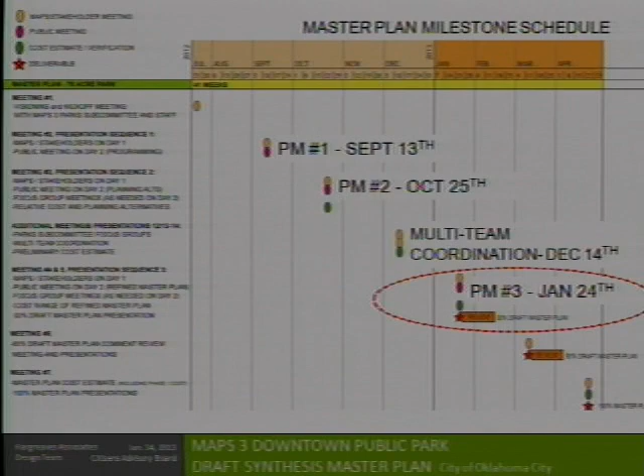We did postpone our public meeting. Our 3rd public meeting was originally scheduled to be before Christmas, but we moved it until tonight, basically to give a chance for the Convention Center team to catch up a bit and for us to collaborate with the Convention Center team some, because there are issues that impact us both, and it made sense for us to meet, which we have done.

Public input, you've seen this before. We asked for public input in terms of the elements that were desired within these categories. We keep this as a checklist to make sure we're fulfilling all we can within the aspirations for the park. We had 3 schemes, which we showed you last time, 3 very different approaches to how we might develop the park.

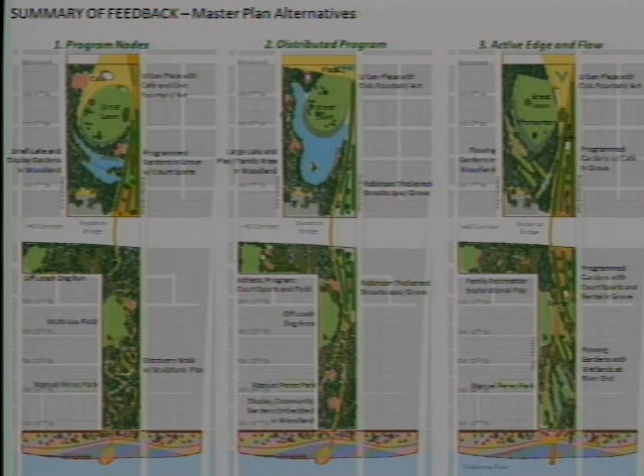We received input on all 3 of those, and basically got comments like: we like the lake, but maybe in this scheme, alternative one, it's too small. We like the way the program is distributed in the park, but perhaps there needs to be more in the lower park, and perhaps the promenade connection to the river needs to be clearer, not the meandering walk you see here.

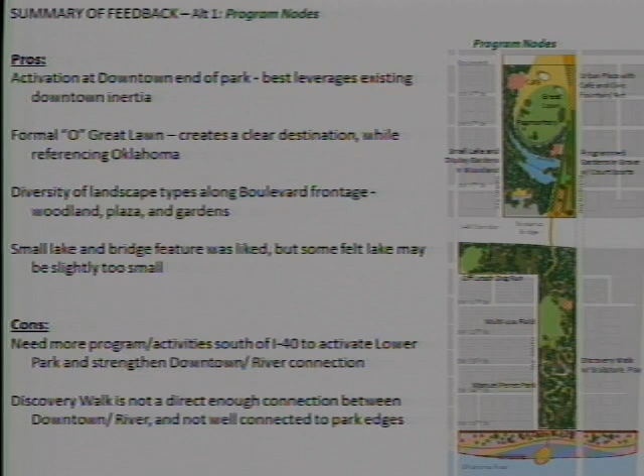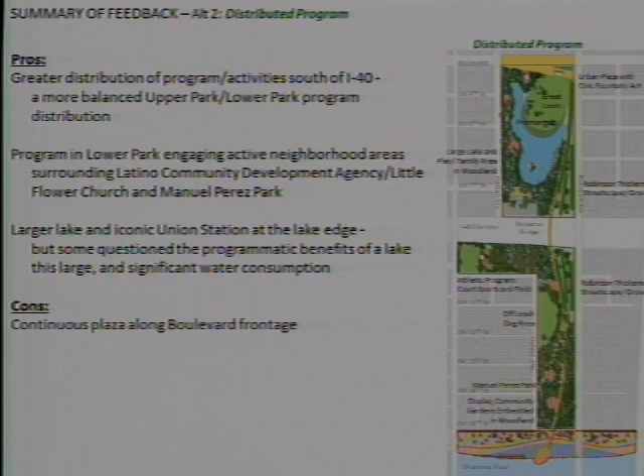Like the Big O lawn, event lawn, whereas in this scheme, alternative number 2, maybe the lake is too big, and maybe addressing the boulevard with one big plaza is too much paving, but we like the way the promenade connects to the river.

And in Scheme 3, we miss having a lake. We think there should be a lake, but we do like the way the lower park addresses its neighbors. The pathway is sort of fanning out and embracing the neighborhoods surrounding the park.

So we took those inputs from those 3 schemes and came up with a synthesis plan that takes the best of each. It distributes the programming throughout the park because it's important that we have an active and dynamic park, but it does emphasize the relationship to downtown and the relationship to the convention center and the 100% corner at Robinson and the Boulevard.

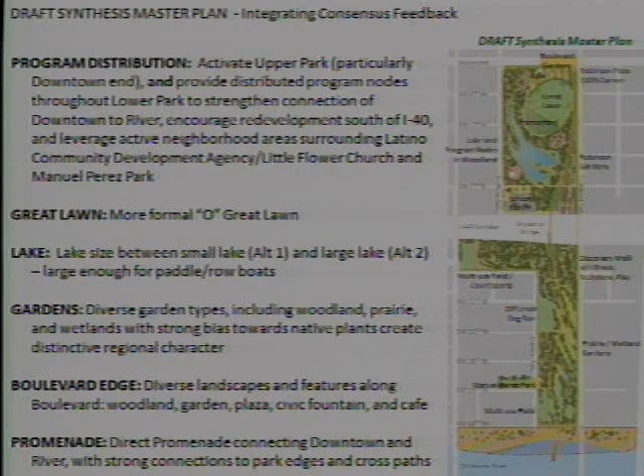So the Big O event lawn is there. A cafe in the future would address the boulevard, and then it decreases in amount of activity as you get closer to the river. So at the river edge, it's more wetland gardens and prairie gardens and those kinds of natural amenities. So you see here a zoning diagram of the plan, with red being the most active, green being passive.

You see a plan without the trees, and then you see a plan with the trees, and you see connection. I want to highlight a couple of things - a connection to Manuel Perez Park in the lower park.

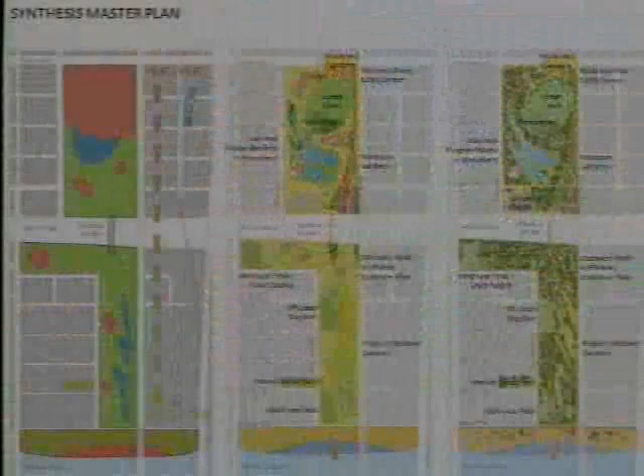We have met with leaders of the Latino community and are very committed to making amenities in the downtown park that can leverage that adjacency and help raise awareness of Manuel Perez Park. We're also proposing multi-use fields and court sports adjacent to the Latino Community Development Agency and the Little Flower Church,

which will be a great synergy of uses for those two community facilities. In the upper park, I want to mention Union Station and the importance it has as a jewel within this park, and the ways it can be reused are quite phenomenal in terms of the opportunity.

We feel very strongly in our recommendations that the building needs to be restored, programmed, and integrated into the park. A lake, big enough for recreational boating and paddle boating, the event lawn as we talked about before, and various children's and adult play areas.

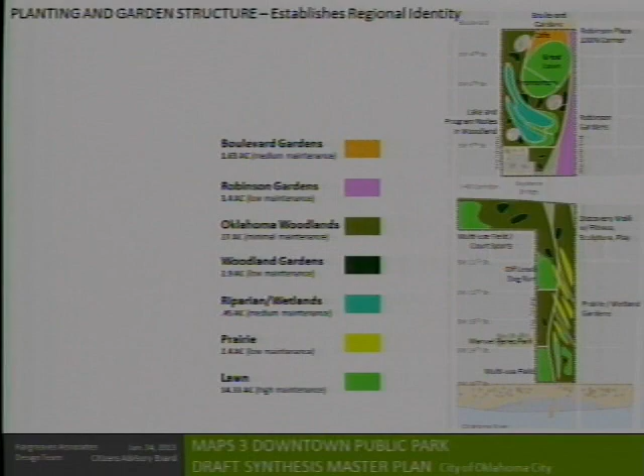This is the landscape diagram of the park. I want to pause here to make a point that we are trying to make this park very specific to Oklahoma. A rich landscape with 70 acres - we're able to create a big landscape that is about Oklahoma, showing a mix of landscape types that will lead to that diversity.

Imagine with the Chesapeake Arena's improvements and their new plaza on the opposite corner - imagine when the Thunder wins, tens of thousands of people spilling out of the arena and filling into this park and onto the event lawn. The event lawn is 6 times the size of the lawn in Myriad Gardens, so it can host very large events, and that's the idea.

And then the boulevard gardens along the boulevard, the cafe along the boulevard, and adult play along the boulevard, and then children's play behind the Great Lawn and adjacent to the lake.

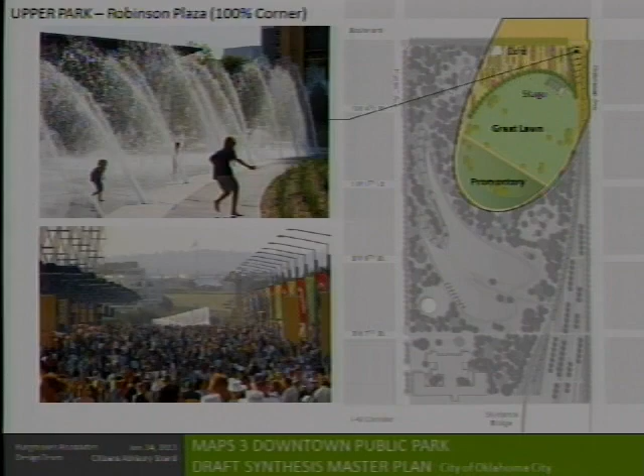So that 100% corner, just highlighting that with the Great Lawn - the promontory hill will be 25 feet high, so it'll be a topographic marker in the city and a destination in and of itself. The fountain, as I mentioned, gardens, as I mentioned, lots of color, lots of richness there.

So that view, and you can see in the upper corner of your slide, you see the little red viewing cone. You're standing at the apex of that triangle, so this is looking into the park from that corner.

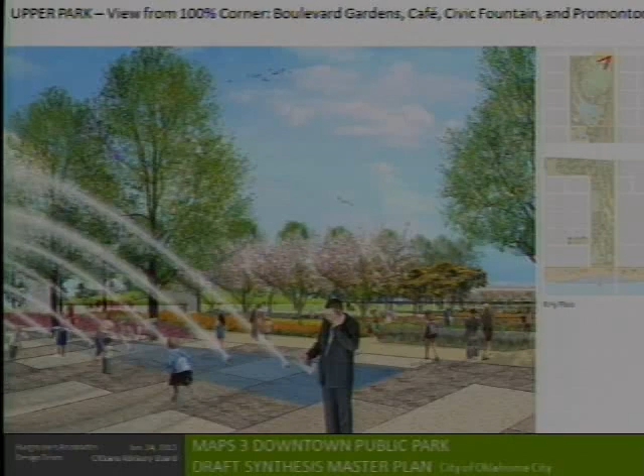You can see an idea of an interactive fountain, you see the hill in the background, and you see the scale of that great lawn and the hill and the stage, compared to Myriad Gardens as a scale comparison overall and as a scale to the Grand Lawn in Myriad Gardens.

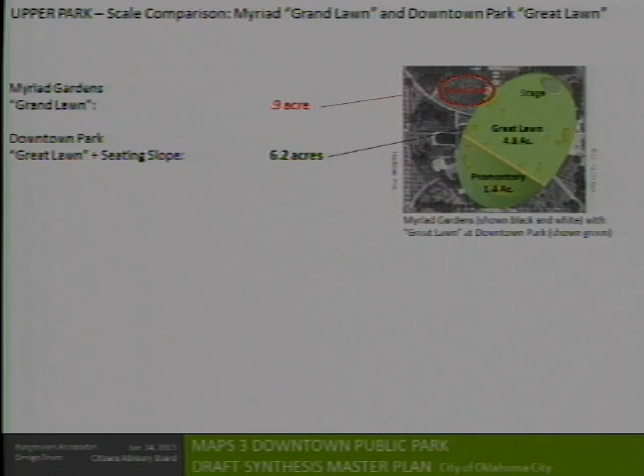We're often asked, how is this park different? Why do we need this one as well? Here's a good example of how and why - it allows such a different diversity of uses and is quite different in feeling.

In this park, standing on the promontory looking back at the skyline, you get this awesome perspective of the skyline because you're just outside of it rather than being in the shadow of the skyline. So it allows that relationship.

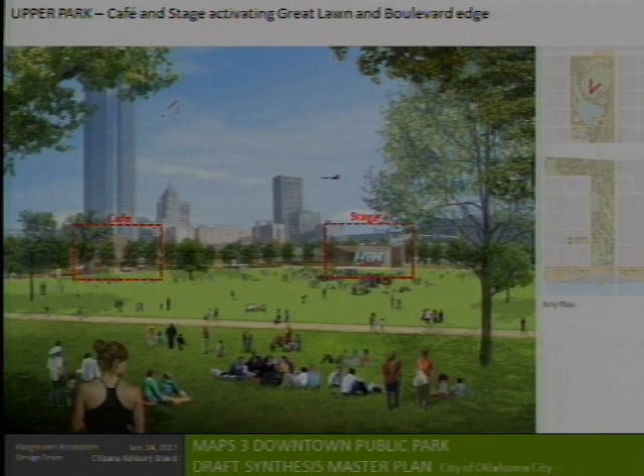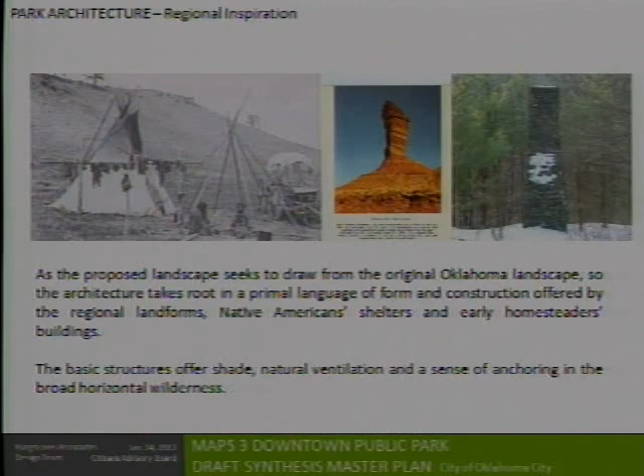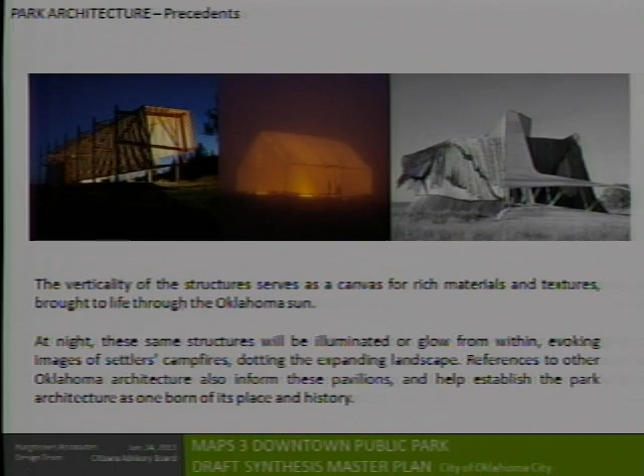The cafe and the stage - our team includes Butzer Gardner Architects, and they're working on a vocabulary that says welcome, hearth, fireplace, gatherings. You see the cafe has a vertical element, and they're drawing from the heritage of the early settlements of Oklahoma. When all the settlers arrived and their campfires were lit at night, suddenly there was this array of lit tents at night - so the idea of hearth, warmth, welcoming, and shade.

So you think about the shade structure being almost more important than the cafe itself, and we feel it's really important to get the idea of the cafe right.

It's not a white tablecloth restaurant. In the first phase, it might be food trucks. The idea is to get activity, energy, a buzz, something that's local and appropriate to the market and will succeed. That's a very important part of our planning.

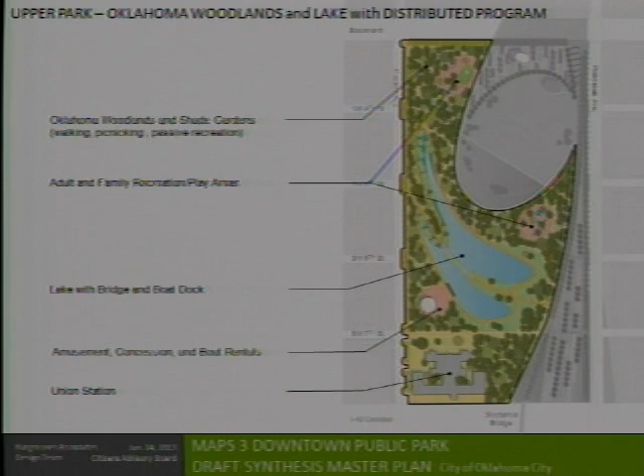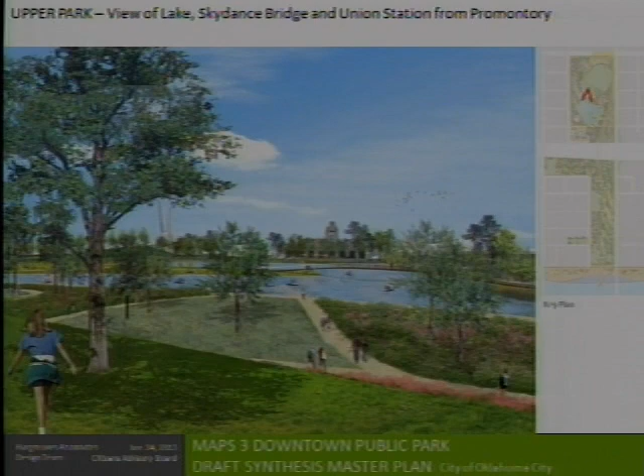The rest of the upper park, including Union Station, is mostly woodlands, with lots of shade, the lake, and children's play and spray ground. If you're standing on top of that promontory and look the other way, you see across the lake to Union Station in all its beauty, and Skydance Bridge. So boating on the lake is very important.

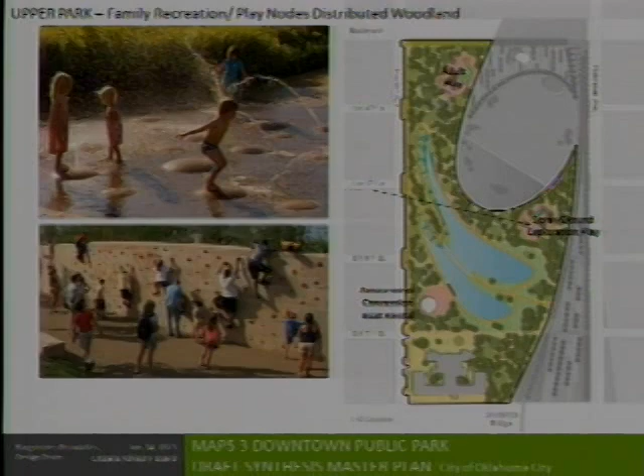Wetland edges with rich diversity of landscape types and plant materials, children's play, water, climbing, and then Union Station and the asset it brings in terms of how it can be used—it's quite big. Right away the two meeting halls could be restored to become a place for weddings, and imagine those weddings spilling into this beautiful landscape.

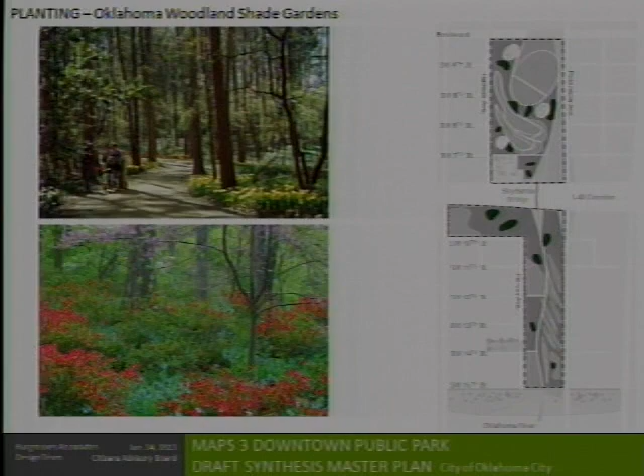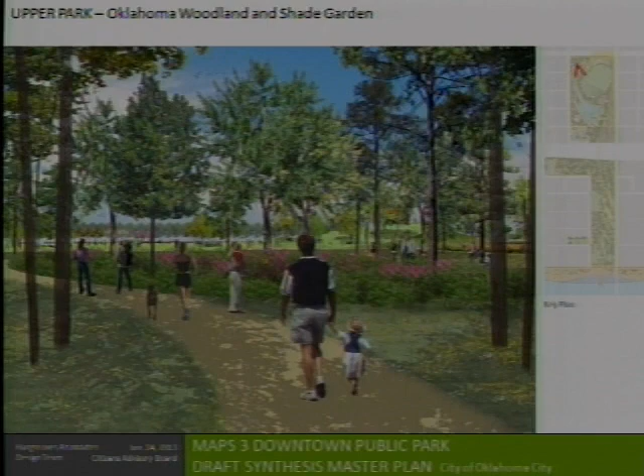Again, the idea of the woodland as we move to the lower park—woodland gardens as destinations within that landscape, not throughout, because we want views through the park, openness, and for it to feel safe, secure, and welcoming, but also places of real rich landscape diversity. This is the view from the other corner, from Hudson and the Boulevard. You enter into a very different kind of character, one with shade and big trees and beautiful landscape.

So that's the model, which is also here on the table, and that's the long-term vision for the whole thing. Moving to the lower garden, I mentioned some of the features of program or uses in the lower park and the relationship to the river and recreation.

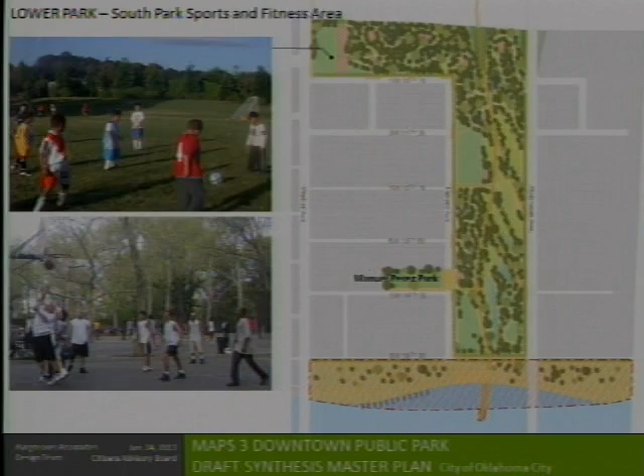Natural landscape, a respite really from the downtown environment. In this view from the lower park, looking north, you see Skydance Bridge and the Devon Tower, but you're in a very natural environment. You still see the edges though, so it still has an openness that makes it feel safe—and the kinds of uses we can have happening in a pavilion and a plaza adjacent to Manuel Perez Park.

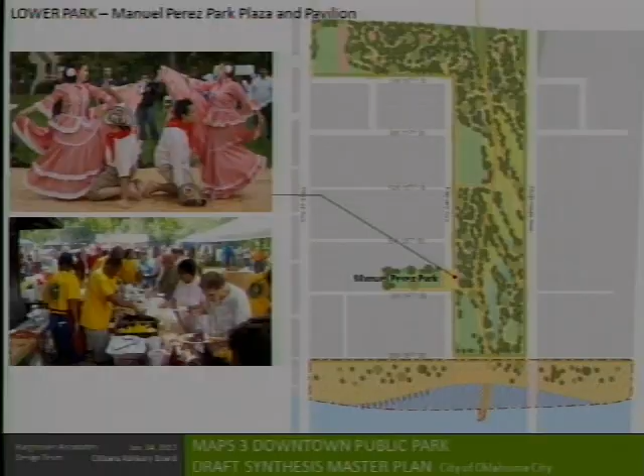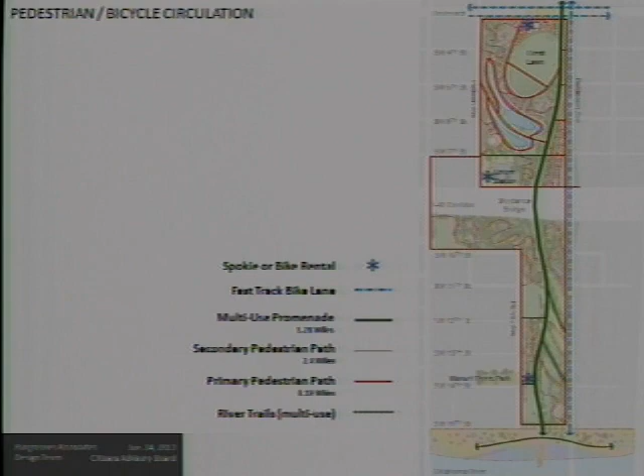Very important—we've been meeting with bicyclists and coalitions who want to use the park in various ways. We have high-speed bicycle ways, shared ways between bicyclists and pedestrians, and trails that are strictly pedestrian. So a full array of ways to move through the park, and links of paths so you could plan your run for how long or how much distance you want to cover.

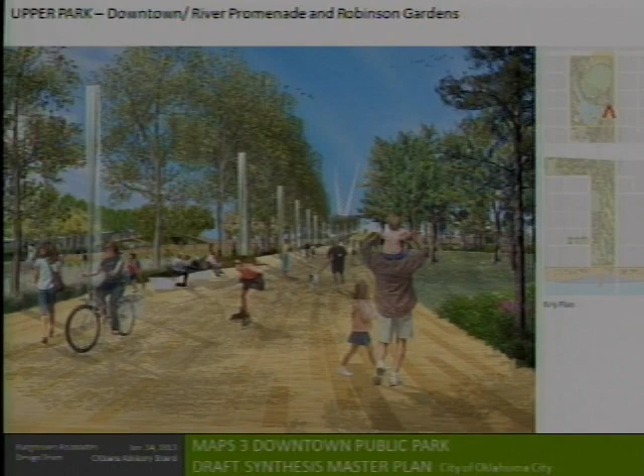The promenade is what ties downtown all the way to the river. Along the promenade are these beautiful lights that will look great in the day and at night, custom benches, people biking—the Spokies you see here in the image—and the promenade connecting right up onto Skydance Bridge in a way that isn't possible today, but will be when the promenade and the park are built. The idea is these iconic lights marching all the way down that promenade, connecting river core to shore.

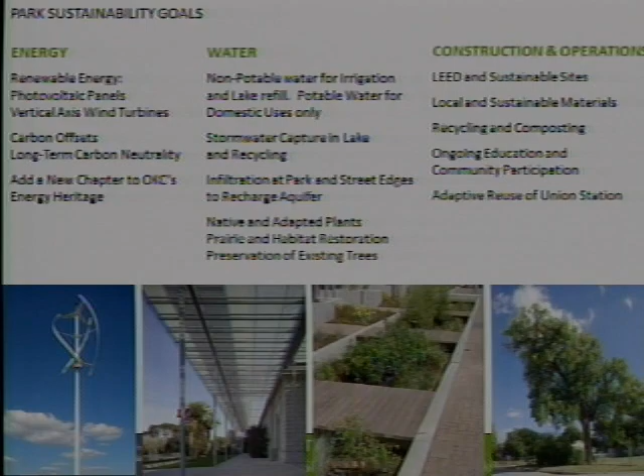And sustainability—we showed you this last time so I won't go into detail, but managing stormwater on the site, alternative sources of energy, using and supplementing the water table, and then using that for the lake and for irrigation, capturing our runoff to make that possible.

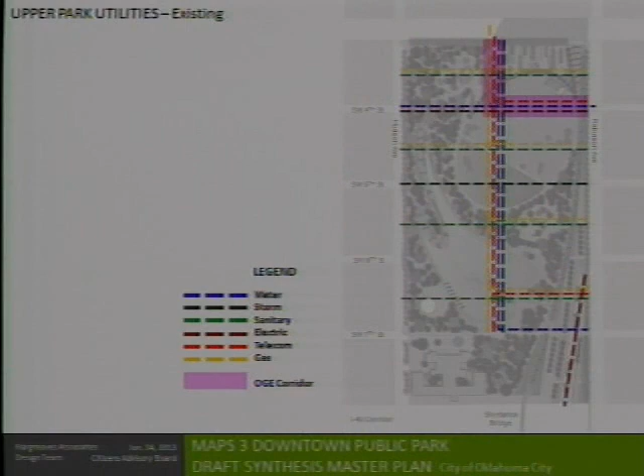We're also looking at ways of using our Phase 1 funds to the best advantage. This isn't finalized yet, but this was the mandate given to us by MAPS. We have certain considerations, like where the utilities are—they're all over the place right now—so we're looking at ways to consolidate the utilities.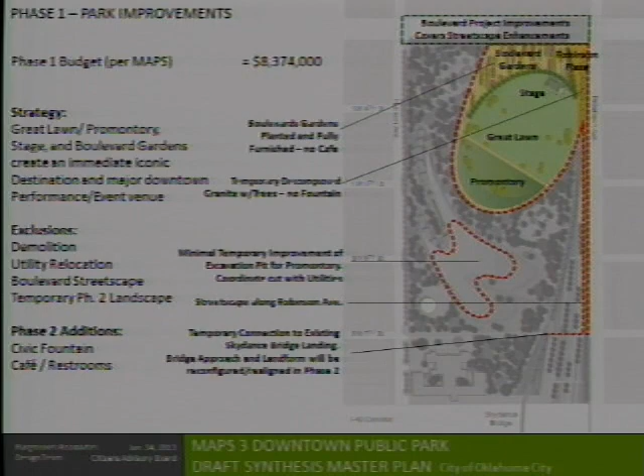We're also looking at going ahead and creating the event space, if we can, in Phase 1, so that it can begin to generate revenue and activity in the park. We're trying to build as little as possible in a temporary way, and build what we can in a permanent way so we don't rebuild it later. These are the Phase 1 analyses we're doing now, working closely with David and his team to figure out how to make this happen.

One thing I want to point out: we probably will not in Phase 1 be able to afford the big civic fountain and our art piece and our lighting piece in the corner plaza. So this corner plaza probably will be a temporary plaza in Phase 1, but the Boulevard Gardens and the Great Lawn and the promontory we hope to be a permanent improvement.

So I'm going to ask Candace to talk for 2 or 3 minutes about some of the issues we're investigating on economics.

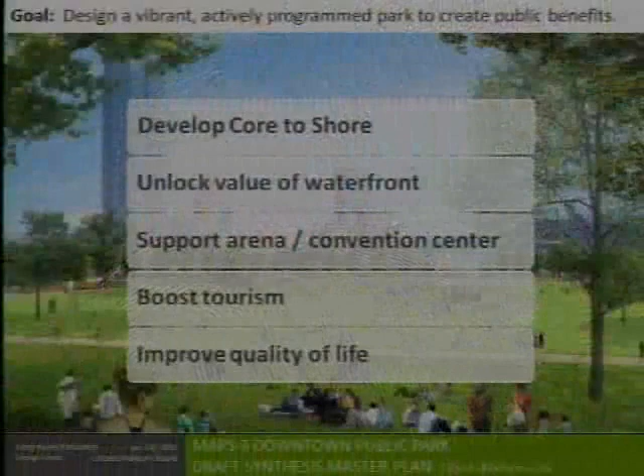It's worth spending a few seconds on why we're having this conversation. What we're finding all over the country, and I suspect you'll find this too as you move forward with these projects, is increasing willingness and interest on the part of civic bodies in investing in projects that brand cities, create economic development, and help create new neighborhoods and taxable value for cities. But thinking through the operations piece increasingly means thinking about generating new forms of revenue aside from the general fund, and these civic investments are being challenged to dream up governance structures and sources of operating funding that can support them after the public makes the initial capital investment.

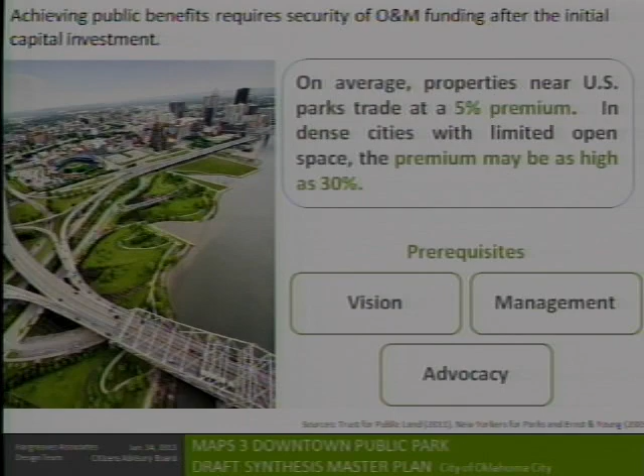We're also finding across the country that, properly managed with sustained civic advocacy and a vision that guides creation of the park, parks create real value — in some places, very significant increments in value. But sustained vision, advocacy, and a competent management structure are absolutely essential to seeing that value created, which is important because over the first generation of a park's operation, you're likely to see operating costs equal to or in excess of the capital costs invested.

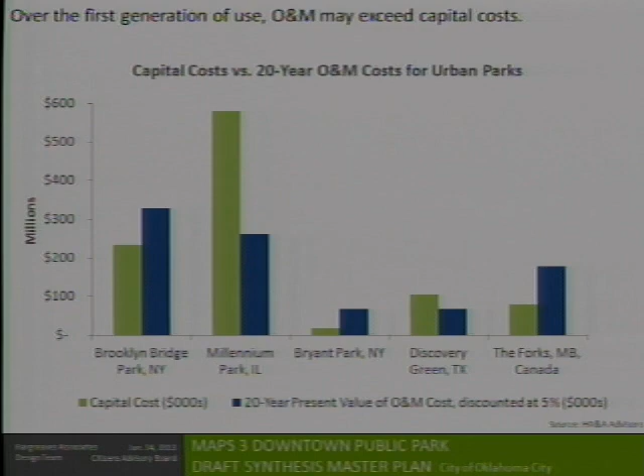Operations of these kinds of signature parks is frankly significant. In this chart, the green bars are initial capital cost and the blue bars are the 20-year present value of operations cost, seen across a variety of new parks across the country. The only exception to that rule is Millennium Park, and the reason is that there's a big, giant parking garage underneath the park on the capital side.

So as cities think about where these new sources of funds are going to come from, they're looking at a range of potential sources — from new ways of diverting public revenue through special assessments and BIDs, all the way to more private forms of fundraising, including tapping into real estate value and looking to corporate philanthropy and sponsorships. In between, there's a variety of earned income ideas that people play with. Where on that spectrum you land, and which sources of funding work, is very much a function of what the specific park is supposed to do.

Is it supposed to create a new downtown? Is it supposed to create a postcard of your city? What are the goals? And then, what do local culture, law, and regulation support?

Given the goals established for this park, you're very likely to be looking at tapping into the value of the real estate that this park will create over time. We think, and we're going to tee this up as part of a menu of options, you'll be looking significantly to revenue achievable from a new BID or HOA established around the park, or an extension of the existing downtown BID. That source of revenue, though, will take time to accrue, so the challenge is to think through where the source of revenue is for the initial phase of engagement.

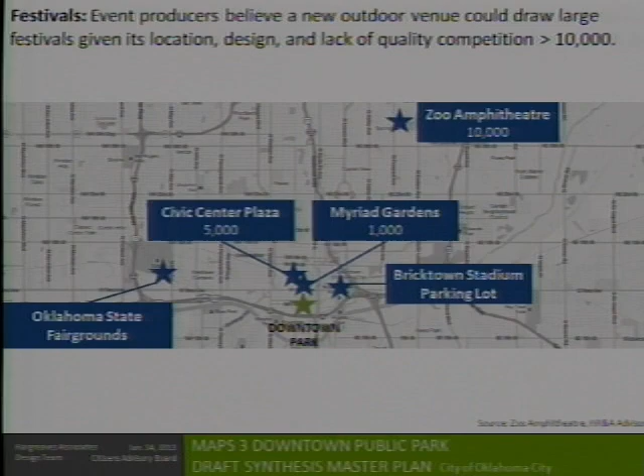We've been looking very hard, consistent with the design for Phase 1, at the potential to generate revenue from events. You have a sweet spot here because this area doesn't have a quality event venue that can support this, at the size the Hargreaves team is proposing to design. There's no 20,000-person event venue of quality in this region.

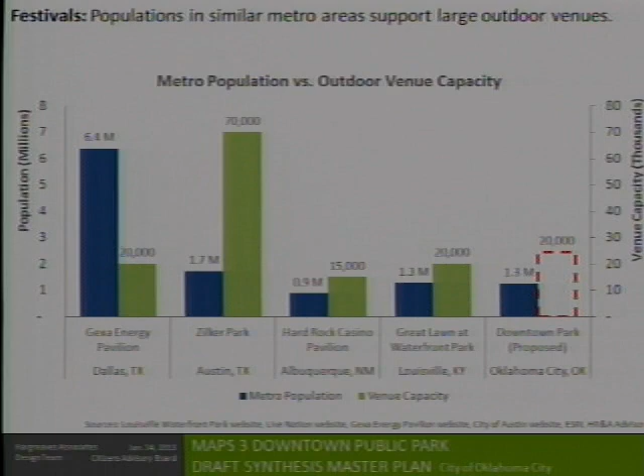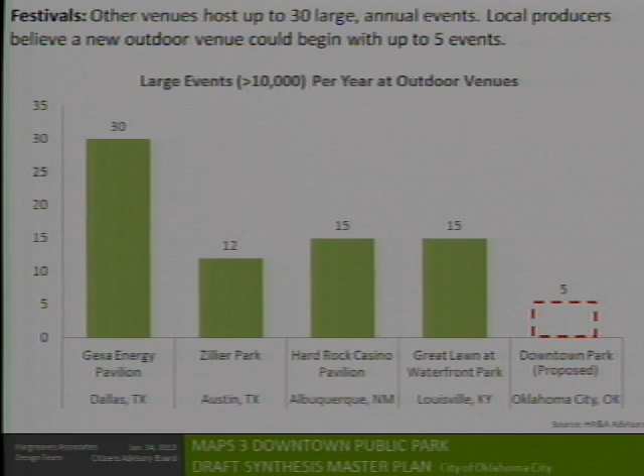If you look at other mid-sized cities across the country, including in this region, there are a host of cities supporting venues of that size, and local event producers believe Oklahoma City could support such a venue. Other similarly sized cities with venues of that nature see them support 10 to 15, as many as 20 or 30 events. We think as a starting point you could do 5 large events in a new venue in this park in the short term, a judgment confirmed by local event producers.

Now, how you manage events is going to be critically important to the achievement of revenue.

There are a host of different ways of organizing events and thinking about how active a park operator wants to be in production. The more actively involved you are, the more money you make, but also the more risk you take on. Thinking through that risk-revenue profile and what makes most sense for the operator of this park will be important in the coming weeks.

I say that because other sources of earned income in this park are likely to be fairly small. The other kinds of earned income implied by what Mary Margaret showed you, boat rentals, bike rentals, and the cafe or food truck operation, will, if managed well, break even, but are unlikely to be major sources of operating revenue.

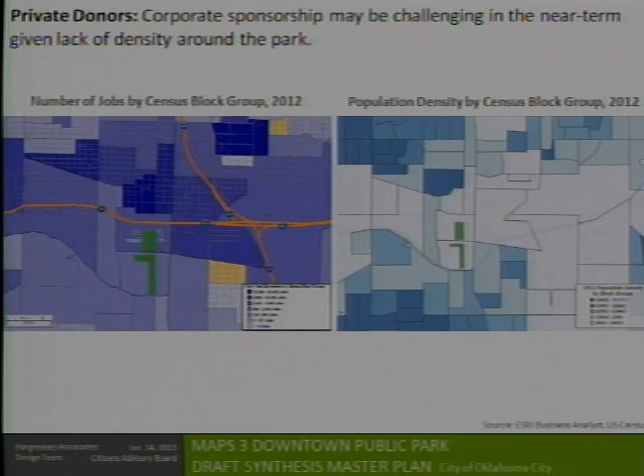So you're looking, in the first instance, to events and potentially to parking revenue associated with events, then potentially to corporate sponsorships. We don't think this will be a place for national corporate sponsorship in the short term because there isn't enough density or enough eyeballs on the park, but you could certainly look to local, civically engaged philanthropists who would want to brand elements of the park as being associated with them. This suggests that at least for the first 10 to 20 years of the park's operation, there will have to be some level of public support in the mix.

Events plus parking plus some modest other kinds of earned income, plus philanthropy, plus some level of public support. We will also be thinking through in the coming weeks how that public support can be delivered in a way that is palatable in the local political context, looking, for instance, at various kinds of fees associated with visitation to the area. Over time, of course, you would expect to see that public support drop off as other sources of revenue come in.

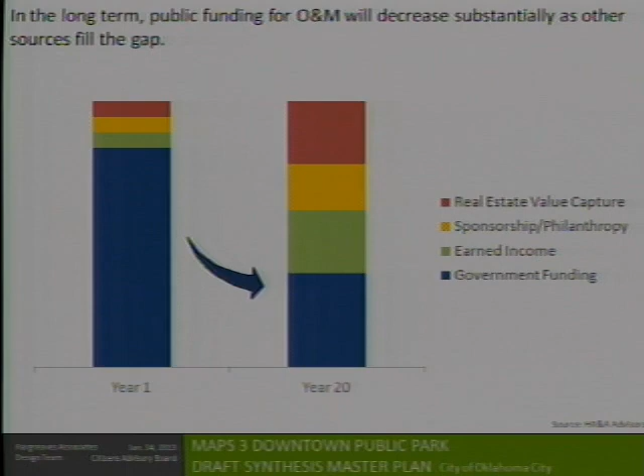Thank you. And I should have introduced Candace a little more fully. That's Candace Damon with our economic advisors, HR&A. Part of our scope is to come up with strategies, possible strategies for you as we complete the master plan.

I just want to conclude by saying that we are doing a great deal of coordination with other projects that touch us and affect us, and vice versa. David has been organizing fantastically productive coordination and collaboration sessions where we're working with the team members for these other efforts: transit, the Boulevard, the Convention Center, and the Alliance development planning efforts. So we're all working together and making great strides in terms of coming up with the best solutions for all of those.

I want to touch on the Boulevard. As part of that effort, we've all been talking about the nature of the Boulevard, and we were tasked to draw that up. We're proposing that the Boulevard take on a transition character in the blocks between the Convention Center site and the park site, so that it narrows down, becoming more plaza-like than road-like in that zone. It still accommodates cars, but it feels like a place for people.

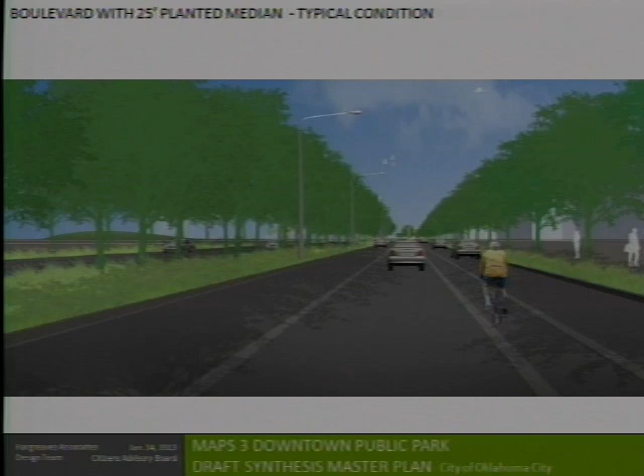So the median goes away as you make the transition coming from east and west at Hudson and Robinson. We pave it like a plaza. We make it as narrow as we possibly can, and therefore as friendly and open as we can to pedestrian movement. So if you're approaching from the east, you see the planted median, and then as you get to Robinson, you see that planted median disappear and become a plaza, which almost makes it feel like you're driving through the park instead of adjacent to it.

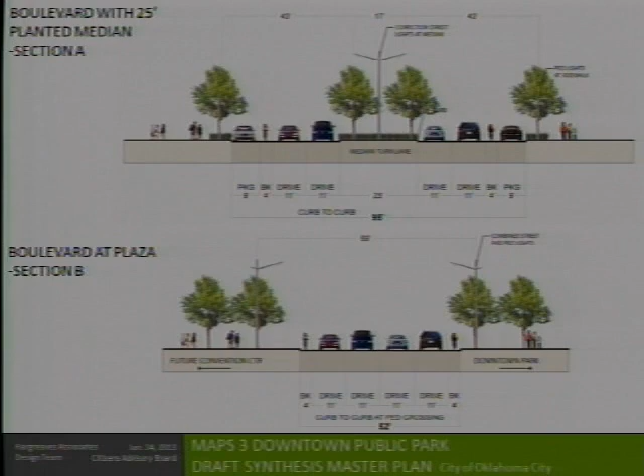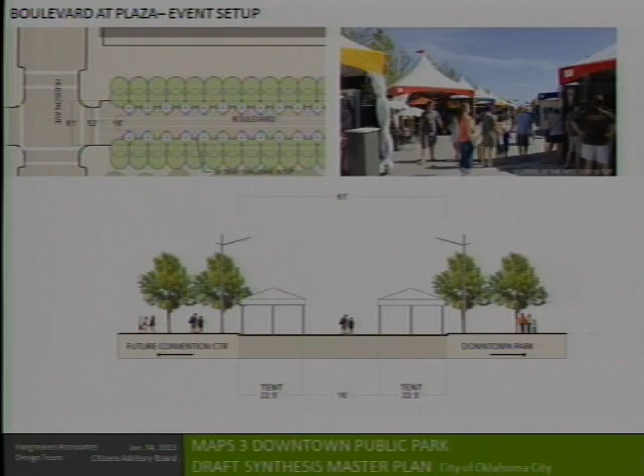These are our proposals. They are still being reviewed by engineers, but we wanted to fill you in on the progress of our thinking, and at least talk about the goal, which is to make a street that could at times possibly be used for events. On that kind of cross-section of road, you can set up a plaza event like you see here, similar to how the Festival of the Arts sets up.

You see this example of one of our projects in Baton Rouge, where the street doesn't even feel like a street, and it feels like an extension of the adjacent plaza and park. That's the goal of where we're headed as a big group of coordinating designers.

That concludes my presentation. If anybody has any questions or comments, I'd love to hear them.

Thank you, Ms. Jones. That was a great presentation.

I appreciate that. You mentioned a couple of ideas for how some of the open spaces could be used, or how Union Station could be used. Can you maybe expand a little bit more on that? Also, do you know if the city would have any kind of mechanism for influencing what types of activities might be fostered there?

Well, yes, the answer would be yes to the latter. We'll be making recommendations about governance of this park as well. Typically these kinds of signature parks have a conservancy board, and the city is part of that conservancy board along with others, and that board would be overseeing things like the programming of the park. There would be staff programming the park, coming up with ideas, being creative about ways to use it, making sure things happen, and making sure they're appropriate. So these kinds of parks need that active programming.

The kinds of things we see happening: imagine free movies on Friday night, ballroom dancing in the park, big events with music, food festivals, bocce, petanque, which is becoming more and more popular in other parks around the city, chess, checkers, and in the active recreation areas, basketball, pick-up soccer. We're not proposing fields with fences, lights, and stadiums, but we're making fields big enough for pick-up games of soccer, frisbee, running, biking, boating on the lake, paddle boating, and children's play for all ages.

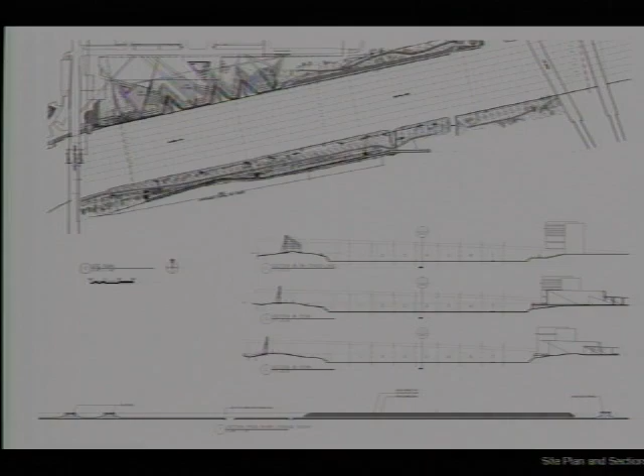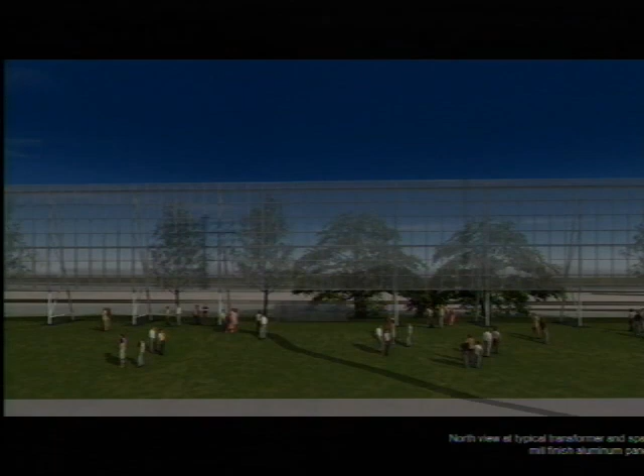Both of these colors would be compatible with the vocabulary of the existing location. As you'll recall from our previous presentations, we have a 10-foot area below that's open, and the screen itself is 30 feet, so the gross dimension is 40 feet in height. Our purpose for this was to block the predominantly southern wind.

The way the wind works is that it strikes this, goes above it, ricochets over the screen, and lands at a position out beyond the river. What you'd like is for it to land on the other side of the river, which would allow the wind to be deflected.

What we've done here is actually create an opening at the bottom that makes the amount of air circulation equal or equivalent.

In our conversations with Mike Knopp about all the events that go on at the river, the most important thing is the ability to ensure fairness, and that's really the important part. Currently, if you were at the river, you'd notice on the southern edge that it's glassy, and as you get further to the north side, it's more rippled.

That represents activity on the surface caused by wind, and the goal is to make it uniform, whether it's all ripples or all glassy. The idea is to create uniformity.

So again, we're seeing alternate finishes. The basic structure follows as closely as we can the property line for the south side of the river. You'll notice it has a very interesting sinuous quality as it moves down through here, because the property line moves in and out.

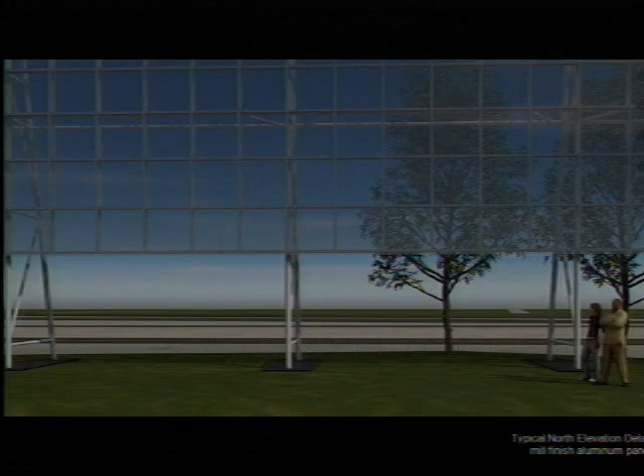It's a structural series of members vertically, 24 feet apart, which creates the modularity I was mentioning. We can add 24-foot sections or reduce it by 24-foot sections, and the sections above are similarly broken down into modular panels.

This is the rear part, and it's interesting because if you'll notice to the right, the structural members are angular in its back leg, and then a series of them are straight. This is what we're calling the pinch point along the south side of the river, where the OG&E easement and the property line come together very closely.

And this would be the approach to it. It's not an economic impact point at all, just a design feature that allows us to move past obstructions along the south side of the river.

We've represented a couple of versions here. One goal and expectation was that this screen could become a projection screen opportunity, and we're investigating a number of things. We have two here, though it's not quite as easily seen in this environment: the first is as if there are no supplemental or ambient lights along the south side of the river, and the second is as if the lighting for river events is on and supplementary.

The interesting thing is that the screens, projections, or imagery could be 500 meters long if you wanted. Part of what Mike Knopp has asked about is the ability to do literal racing in real time, with the opportunity to project images. There are any number of opportunities for events like the Dead Center Film Festival and so forth.

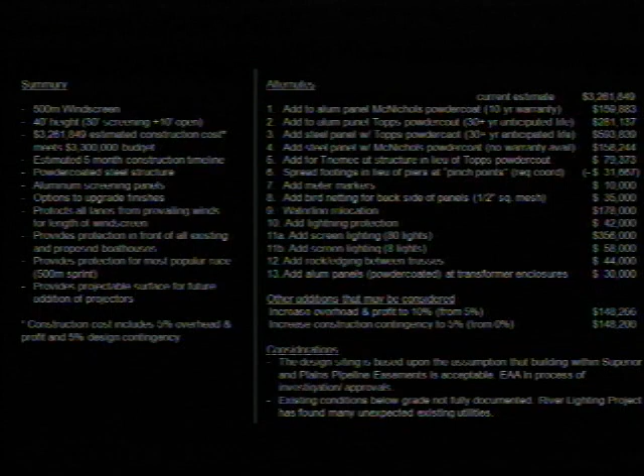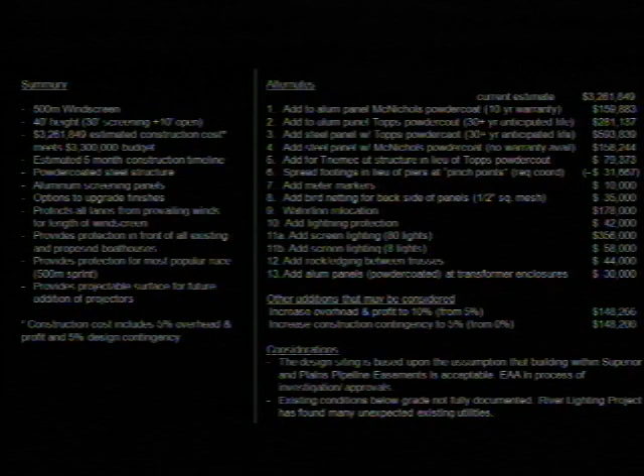I won't go into this in great detail, but I think you have copies of this. This is our way of putting together this alternates list, and the idea is to represent and study all sorts of optional things, everything from how we might light the screens to the finish on the panels themselves. It's there to help us control budget and also to consider opportunities as the project is completed. I'd be happy to take any questions.

Any questions? Would this much aluminum interfere with cell phones? To our knowledge at this moment, the answer is no. This is one piece of it. Cell phone coverage is an atmospheric kind of thing. This is a sliver, if you will, very small compared to the volumes of requirements for cell phone coverage.

Motion? This comes to the committee with a recommendation from the River Subcommittee, so I would move approval. Second? All in favor? Opposed? The recommended resolution is approved. Thank you, Rand. Thank you very much. Appreciate it.

Item 11, recommended resolution approving site evaluation and conceptual design report for the MAPS 3 Oklahoma River Phase 3 Whitewater Facility, Project M3R004. Madam Vice Chairman, continuing on with projects at the river, this is a very exciting project we have, and this is a conceptual design report. It's not a preliminary report, but S2O, the consultant, was asked to look at certain things because of the issues around the property before we go full-blown design-wise. So Mr. Jeffrey Guston with S2O is here to give us a presentation on his conceptual design.

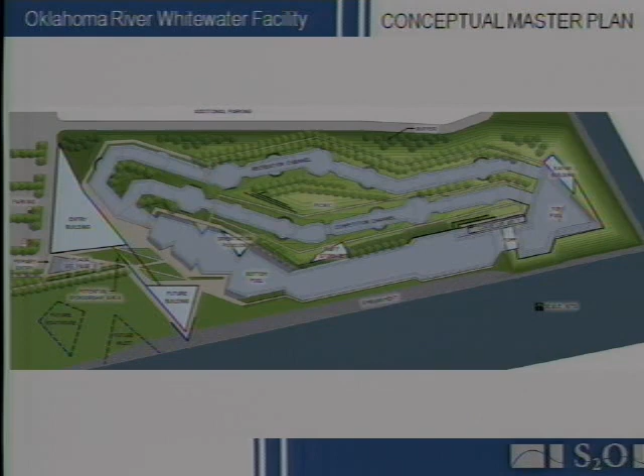This is a schematic of the channel system itself, identifying 4 unique channel experiences. The lower pond is used as a beginner channel experience, low gradient, instructional type use, for integration of safety provisions and moving through the course. As you travel through the bottom channel, there's a fully operational conveyor that takes you to the top pond, with a selection of 2 channels from there: the recreational channel being a low gradient channel, and the competition channel being more aggressive and also for hosting events. Both channels flow back around to the main building and join at what we're calling the freestyle channel.

One more section through the channel: this is the competition channel on the left, the recreational channel to the right, with a bermed mound between the two with an offset crown. We have shade trees more towards the recreational channel, and we're trying to take advantage of the competition channel landscaping for seated events, with stepped seating, and areas along here for trail connectivity.

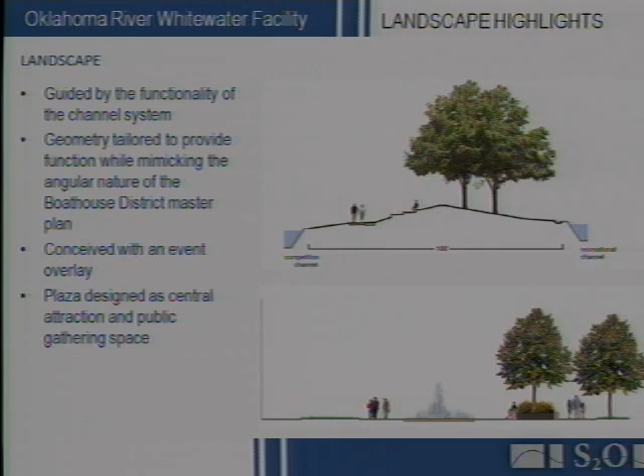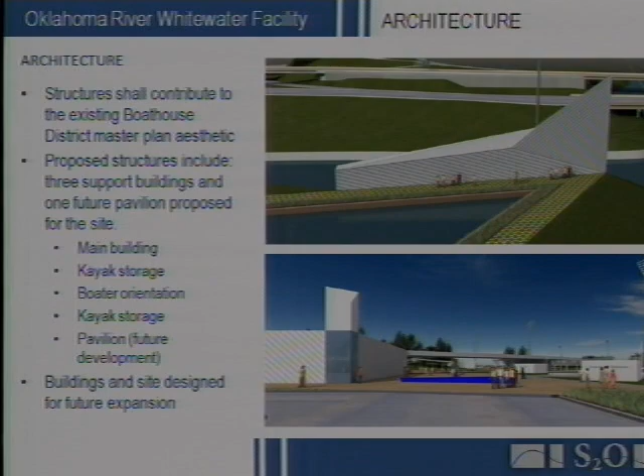Part of our study for the main building was also looking at the possibility of expansion. So we're looking at the main building, which is 18,000 square feet on the ground floor, providing the structural design inclusive in phase 1 to basically be able to expand the facility to a second floor in future use.

A lot of our pre-design efforts were focusing on the technical issues of the project—what are the pitfalls that might befall us going forward, trying to understand those so we can move forward at a rapid pace. So there's a host of issues here, most of those utility or land related. I'll just highlight those real quick.

First is sanitary sewer. There's an existing 54-inch sewer main that runs along 5th Street and along the channel. Essentially we had two design decisions here: either relocate it, at significant cost upwards of $750,000, or try to design the course within the existing infrastructure. So what you're seeing is the second option, where we designed the course to fit within the land available south of 5th Street with no disturbance to the existing 54-inch sewer main. At present, there is no conflict.

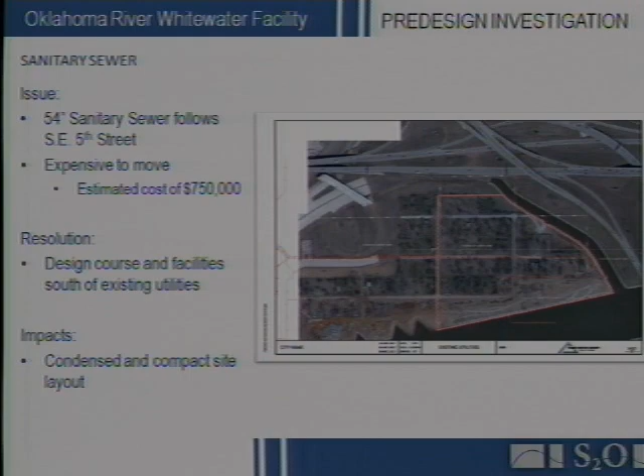The second issue with utilities was the power lines. Two issues here: along 5th Street, overhead distribution lines, and along the river, overhead transmission lines, both by OG&E. The city has had conversations with OG&E, and both lines will be removed. It's an issue of time and cost at the moment, so neither will be an issue for us moving forward on the project.

Another utility-like issue for us is the floodplain. We're well within the floodplain, and we have two issues related to the design with the floodplain. One is building elevation—all buildings will be above the floodplain as required, essentially at the same floor elevation as the existing boathouse structures, at 1177. The second issue is the channel itself being in the 50-year floodplain. The edge of our channel, which is the pool deck, we'll be building the top of our pool deck a foot above the 50-year floodplain. So again, no issues here—we've had conversations with Public Works, and we can accommodate the design within the floodplain.

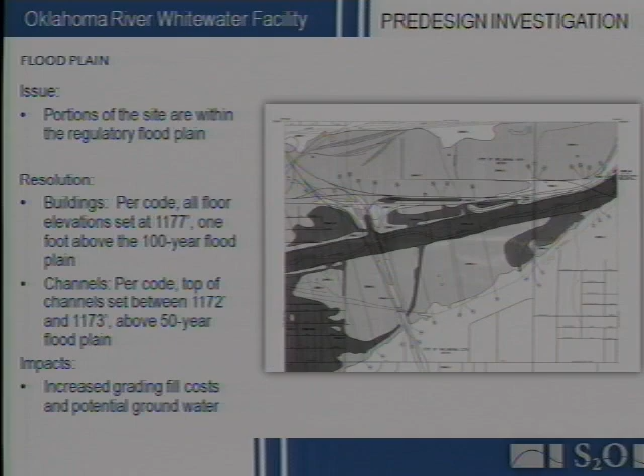Grading is a big issue for the project—the first 6 months of the project is moving dirt. So at this point, even though we'd typically do this in schematic design, we looked at it in conceptual design to see how we can balance the site and move forward with the floodplain issues, making sure we can grade the site out. Again, no issues at present. We have not done any soil studies yet, so there are some unforeseen possibilities as we move forward, but we feel confident at this moment that there are no grading issues.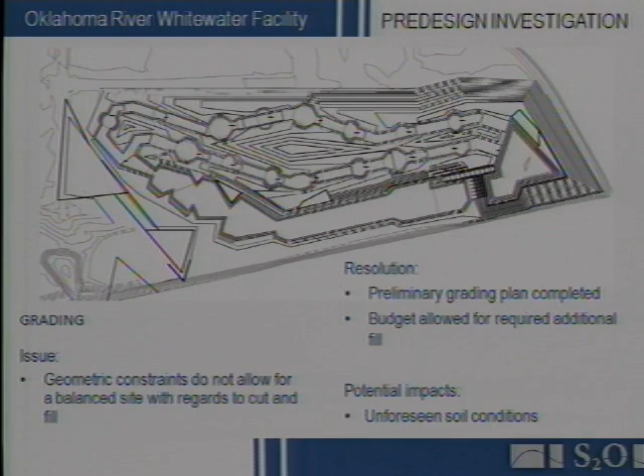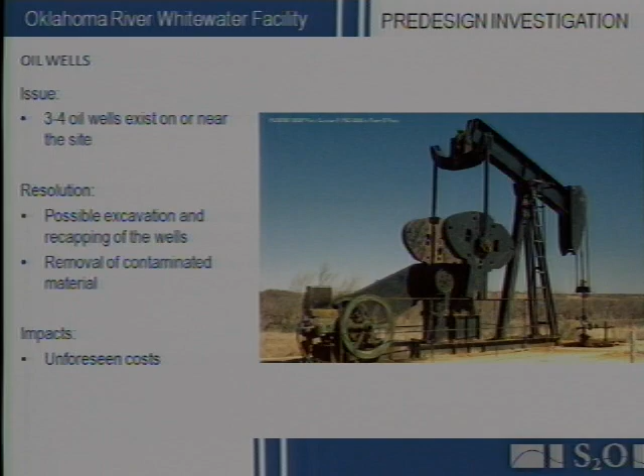Oil wells, consistent with Oklahoma City, there are 3 oil wells that we know on site. From the investigation we've done at this moment, minus subsoil exploration, we do not see any issues with capping these and any soil contamination.

The last issue related to the utilities and impacts of the site is the water. We've talked about this a few times now - the source of the water as well as the quality and regulations associated with it. The source is city municipal water. We'll fill the 12 to 13 million gallon bathtub, so to speak, on day one with city municipal water, and then we have a daily top-off requirement that would essentially be filled with well water, which we'll drill on site. We haven't done the drilling yet.

Through pre-investigations, we think the water quality will be at recreational standards, so we will be using a well for the top-off. The second issue regarding water is the actual quality and standards related to that. We've had exhaustive conversations with both the Department of Health at the state and county level, as well as the Department of Labor, which will be reviewing and regulating this as an amusement ride. It's a little counterintuitive, but they'll be the primary jurisdictional authority. Since there's no true standard - it's certainly not a commercial swimming pool - we'll be providing best management practices and essentially setting the standard. A lot of that will be driven off what we did in Charlotte and similar scenarios. We present the case, they review it, and they'll have final say on the regulations.

Planning and zoning - not much to talk about here. We do not have any off-street parking requirements for the zoning. However, we are providing ample parking because we'll have ample patron load. We're looking at 300 paved parking spaces in phase one, with 100 grass overflow spaces.

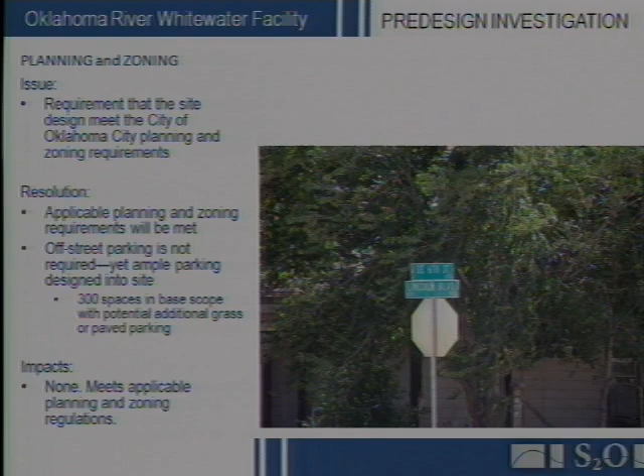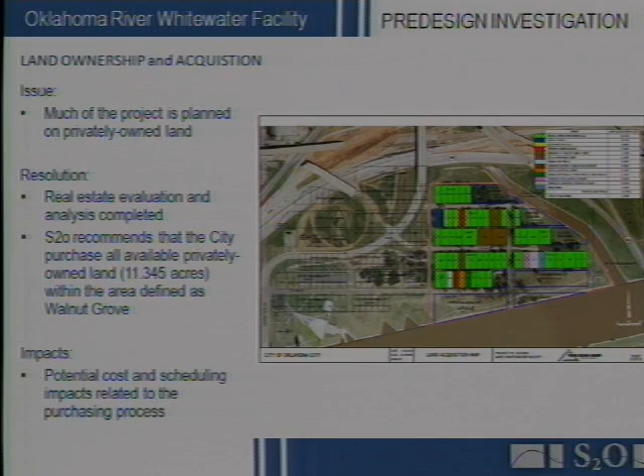There's ample space for additional overflow parking in the future. Regarding land, we talked about this as well. Our recommendation is there's 11.4 acres of privately owned land, 2.5 acres of state-owned land, and the rest is owned by the city. We recommend to the city that all land be purchased at this moment - it can be used either for the development or for future expansion of the facility.

And then project cost - we didn't talk about this last time, so I'll spend a little more time on it. In short, we're in budget. We're conceptual in nature, so essentially we've reviewed the project and put the project scope in line with where the budget is. That means there are opportunities for future expansion of the project. What you have in the base budget is land acquisition cost, site cost, parking, site amenities, and the development of the site with associated costs.

You have the main building at 18,000 square feet, and 4 ancillary buildings totaling about 6,000 square feet, plus the pump station, so we're about 25,000 square feet in total building square footage, along with landscaping and various site amenities. Outside of that, we have about $7 million in alternatives that we'll look at through subsequent design - additional programming via splash pads, additional programming for the whitewater, and additional building space. We'll be analyzing that as we move forward.

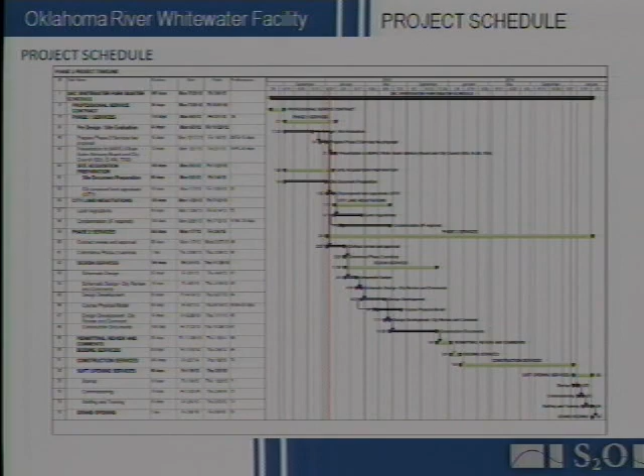The project schedule is essentially 26 months, and there's a bit of science to when we open. You can open year-round since this will be a year-round operation, but the goal is to open similar to a water park - opening in April, seeing high season through the summer, then shouldering off in late October, November. You don't want to open on April 1st, so you want a soft opening. We recommend about 60 days for that - training, configuring the channels, training safety staff, and having the fire departments come out to understand how to operate the facility. So we're looking at about 24 months from now, a soft opening in late January, February, and a grand opening in April.

To do that, we're saying 9 months from beginning of March in design, letting the contract out at the end of the year. We'll have bids and be able to put a shovel in the dirt, so to speak, early next year. With that, I'll take your questions or comments.

Thank you. Thank you. Appreciate it. Any questions? I just have another wow.

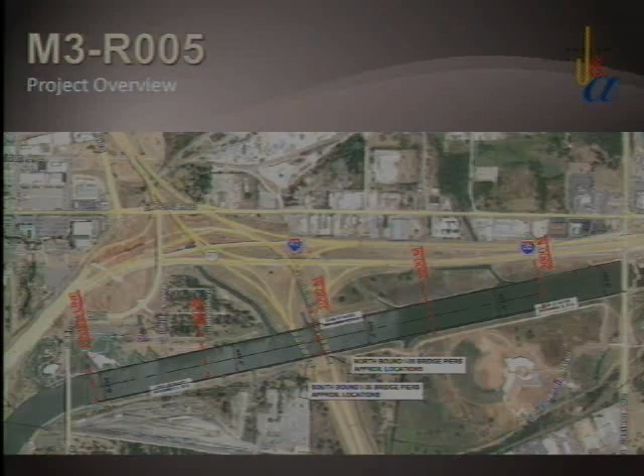Basically, at each one of these locations, we're crossing the river with a bundle of conduits that will provide power, communication, video, things that the river operator or event operators need to communicate with towers constructed on the south side. In addition, we are proposing a new cabling system, called an Albano cabling system, that interconnects with the lane markings for the ability to use the starting gates the city has already acquired, so they'll move from one starting point to another.

All of that is underground items. So we need to get the underwater stuff improved, the electrical conduits I mentioned, the anchoring system, and then we are also adding additional boat ramps along the south bank.

Just by example, the draft plans, as you see them, these are very hard to read, of course. These are just identifying the locations where we have to put in some stone anchoring, concrete anchoring, and the conduits that will also have to be ballasted to keep them from floating out. Typical cross-section here of where that'll be located. The wide area is gravel for the anchoring system to sit on. The conduit is the dash line ahead of it.

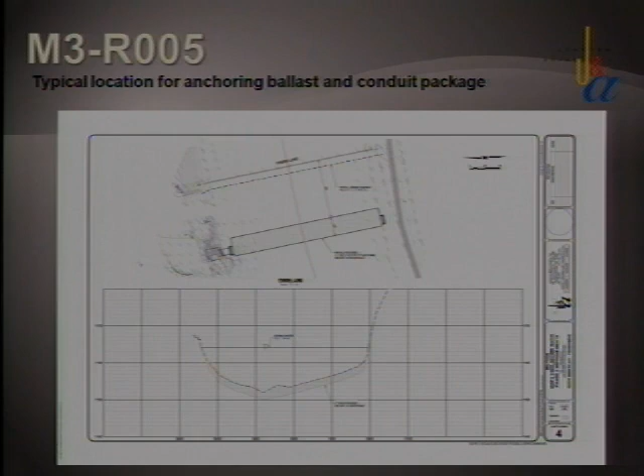This is an example of one of the boat ramps, an existing boat ramp at around the 500-meter location that the city uses now. It's just a drainage swale. We're going to pave this and make adjustments to the access drive so it can be more easily used. Currently the gates they have now are being taken out manually, with guys down there pulling them out of the water. This will allow for an all-terrain vehicle to pull them out.

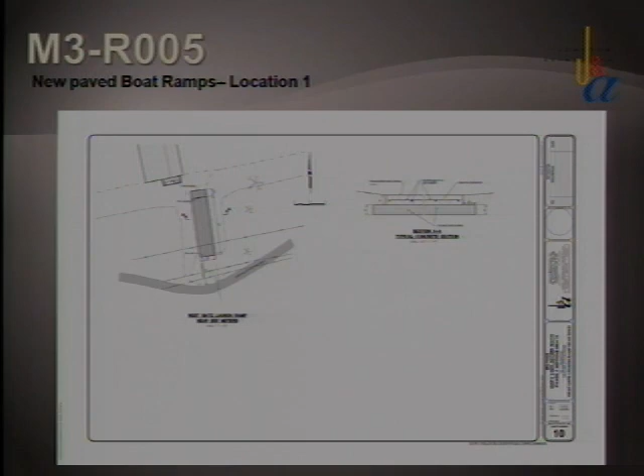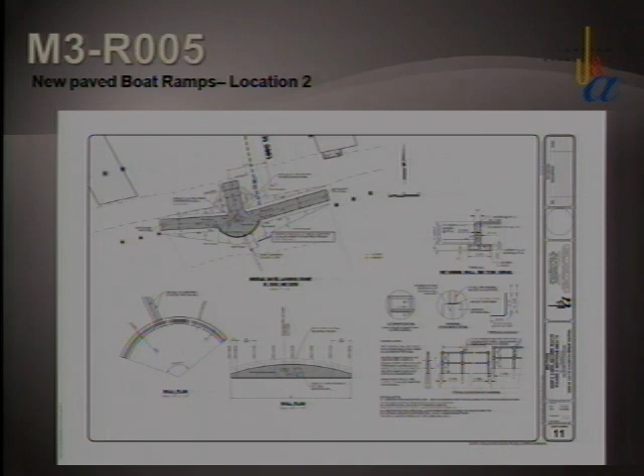Another one of our locations is at the 1,000 meters, a little more difficult in that we are between the northbound and southbound lanes on I-35. So this is a more elaborate installation due to wanting to minimize our impact to ODOT's property. The last ramp we're proposing is near the 2,000-meter mark, and again, because we're abutting the Indian property, we've proposed a more elaborate boat ramp area at this location.

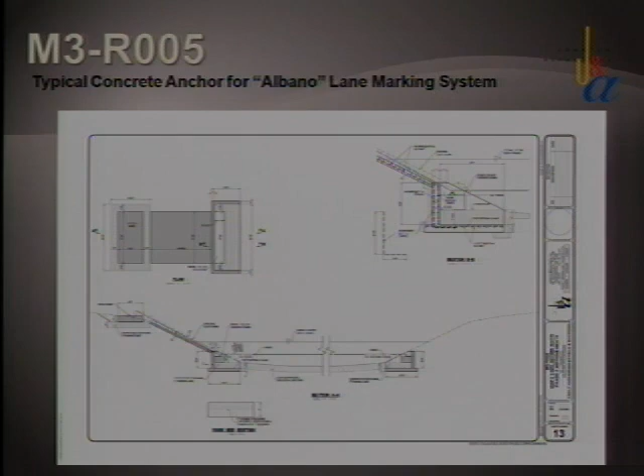A typical cross-section of the concrete improvements shows massive blocks of concrete that will hold down the tension of the cables as they're pulled and winched across for each lane. In summary, we're going to do the most that we can do with the water down, and then the rest of the work in Phase 2 will be done as part of Project 2. With that, I'll be happy to answer any questions.

Any questions? I just have one comment, Tim, that oftentimes there's more complications in the back of the house, more things going on than in the front of the house, and I think we're all learning to have great appreciation for that as well. Any more? All in favor? Opposed? It has been approved. Thank you very much. Do you have something, David? We have nothing further.

Item 13, discussion and action on MAPS 3 programs. We don't have anything, Madam Chairman.

All right, thank you. We'll go on to item number 14, MAPS 3 Citizens Advisory Board Subcommittee reports. Quickly, Fairgrounds, Bob? Okay, Nathaniel? Say nothing? Okay, Mike, do you think we need to add anything?

Well, obviously the River Subcommittee has had several projects going on, as you saw today, and we have a lot of things planned over the next few months, so we're looking forward to all the activity.

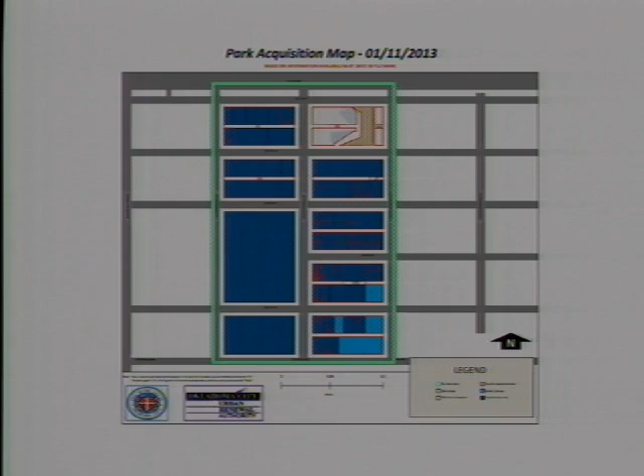So we continue on with that and hope to have it finished soon. Okay, and this time, David, do we have any other updates and status of any of the MAPS 3 programs? Madam Vice Chairman, I'd like to reiterate for the citizens and everyone out there: as far as the river, the race course lighting is under construction and that continues. We saw the windscreen preliminary report today; that will be sent on to council.

The Whitewater will soon begin their preliminary design. We saw the conceptual design today. And Phase 2 improvements that Mr. Johnson talked about are in design.

The senior wellness center, Mr. Dover mentioned, has a pre-proposal meeting today at 2 o'clock for the operating partner request for proposals. Trails and sidewalks, Phase 1 of the sidewalks are in design. Two sections of the river trails, which make up the complete river trail, are in design, and right-of-way acquisition continues on that.

Convention Center conceptual design continues. There have been many meetings, very similar to the park, with focus groups ongoing. Fairgrounds Phase 1 grading continues at the fairgrounds itself, and design of Phase 1 improvements continues. Expo Center design will soon begin, as you saw the agreement for A&E today.